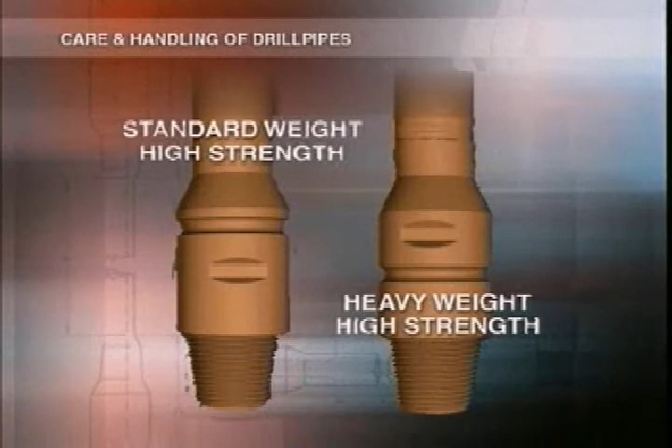In this section, we'll look at the descriptive markings that help to identify drill pipe. The first one is the high-strength identification groove. It's milled into the pin-end tool joint by the manufacturer. It tells you which pipe is high strength and which isn't.

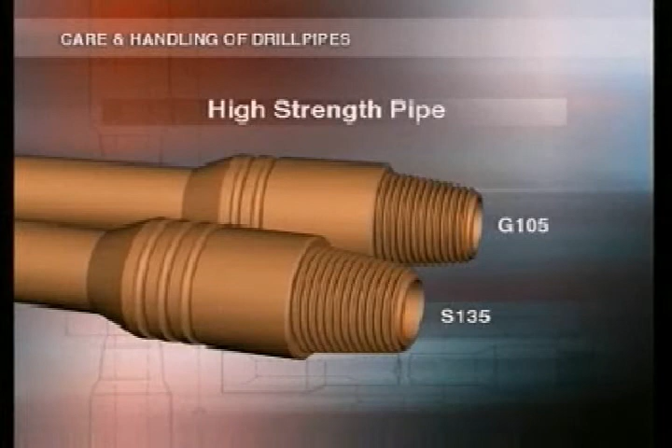For example, if it's in the center of the pin, that's standard weight high-strength pipe. If it's towards the taper of the tool joint, that's heavyweight high-strength drill pipe. Generally, most high-strength pipe is either G105 or S135, and standard grade is grade E.

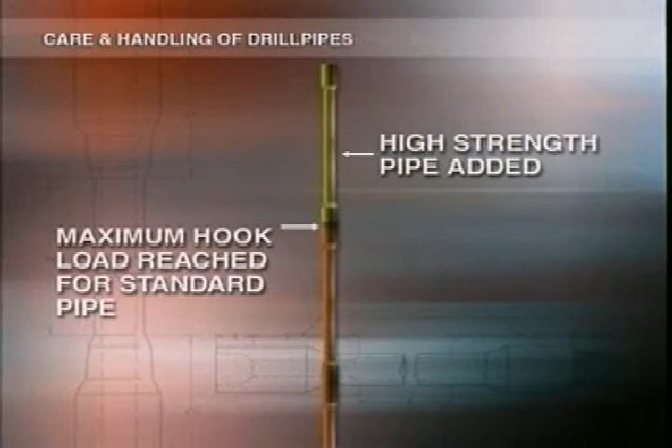When the maximum hook load weight has been reached for the standard pipe, high-strength pipe is added to the top of the string so that we can continue drilling. It's made of stronger and harder steel, so it can hold heavier weights. There is one major disadvantage, though. It's more brittle than the standard pipe.

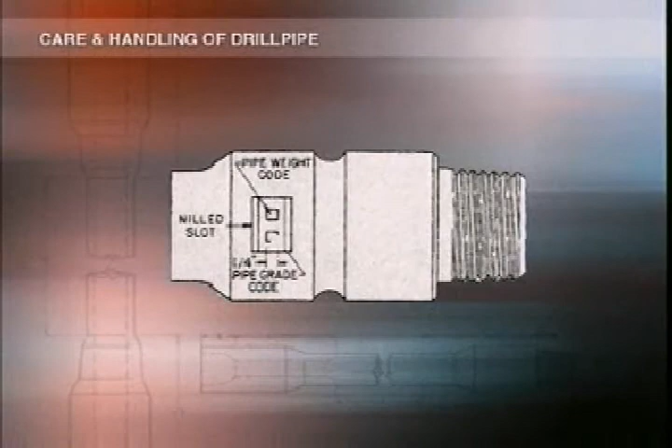Another mark in the pin is the identification milled slot. Inside it, you'll find the pipe weight code and the pipe grade code. Each joint bought by any one rig is sequentially numbered. The number may also be stamped on the tool joints by the rig personnel.

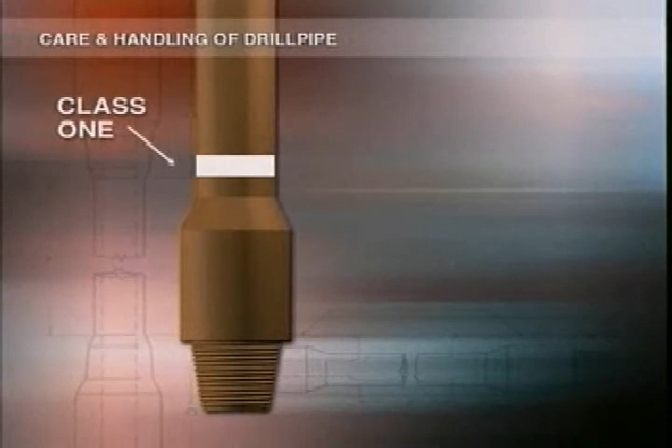We've already seen how bands of paint are used to identify particular conditions. Pipe bodies have their own set of markings. Get to know the system, because it'll help to avoid confusion when you start drilling with a string that's recently been inspected and graded. A single white band around the pipe body means it's new and has never been in the hole. That's Class 1.

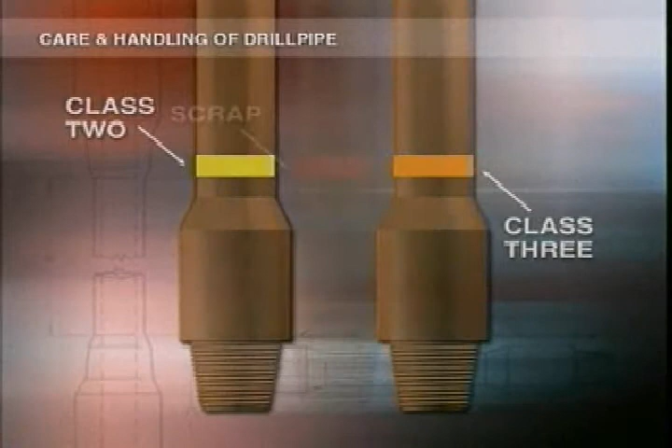Pipe that's been run at least once but is within specs is called Premium Class and has 2 white bands. A single band of yellow is Class 2, an orange band, Class 3. A red band means that serious damage has been found. This is scrap pipe and should never be run into the hole. The bands are all about 2 feet from the tool joint on the pin end.

Tool joints are classified using a similar system. New pipe doesn't have any paint on the tool joint. It'll only be marked on the pipe body, so a single white band on the tool joint doesn't mean it's a new one. The other markings are the same. 2 white bands for Premium,

1 yellow for Class 2, an orange for Class 3. A red band, which means either scrap or shop repairable. There can also be a green band to show that the pipe's field repairable.

You'll probably come across pipe with different classifications for each of the tool joints and the pipe itself. That means that one part has deteriorated faster than the other. The pipe classification reflects the maximum hook load it can support. The tool joint classification reflects its maximum torsional strength.

In this example, we're checking for maximum hook load. It's 5-inch, 19.50 pounds per foot, grade E drill pipe with 2 white bands on the pipe body, a yellow band on the pin, and 2 white bands on the box. So we look at the bands on the body, which tells us that it's Premium Class.

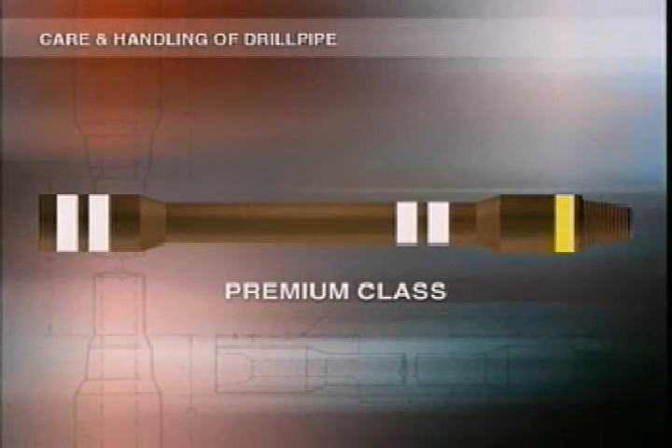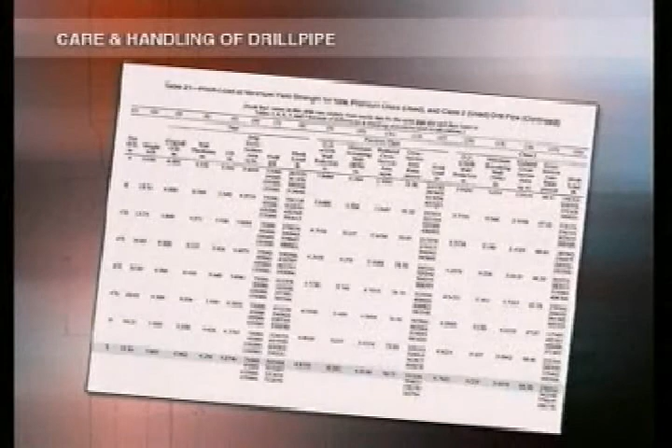We look up 5-inch 19.50 grade E drill pipe in Table 21 of the RP7G and find that Premium Class pipe has a maximum hook load of 311,535 pounds. Table 10 tells us that the significant factor in determining torsional strength is the OD of the box.

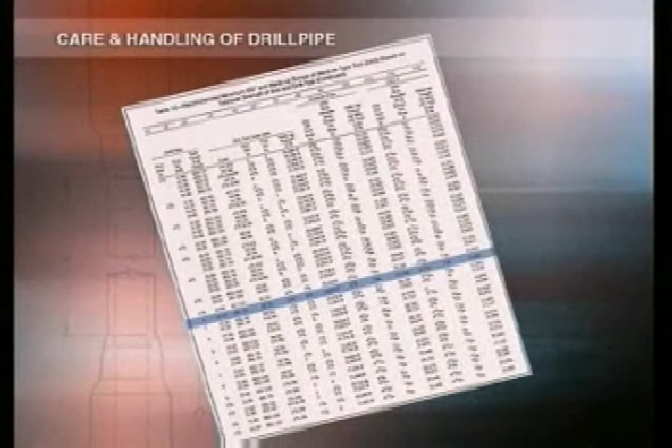Using the same tubular 5-inch 19.50 grade E, we see that the Premium Class box has a recommended make-up torque of 15,776 foot-pounds. For a Class 2 box with a thinner worn wall, it's 14,082 foot-pounds.

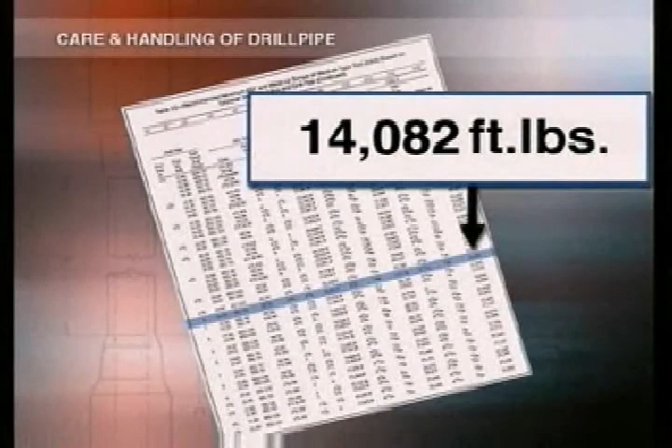After pipe's been run into the hole, the paint will wear off, so you can't rely on the coloured bands all the time. Because of this, the inspection company stamps information into the taper of the pin. Here we have the serial number of this joint, 128, the symbol of the inspection company, T, the classification of the pipe body, the dot, and the date it was graded, 96.

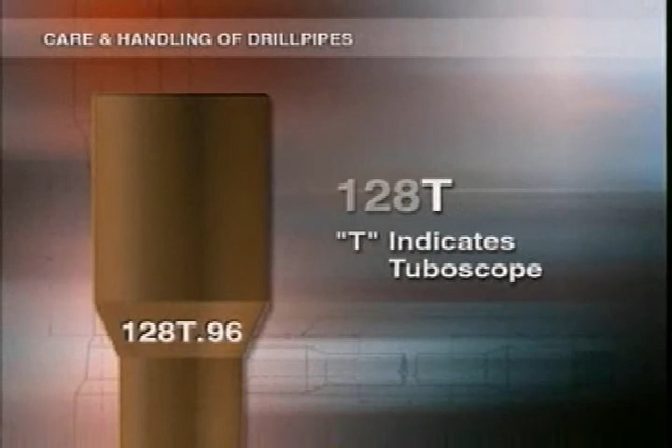If you want to, you can now get all the data on this joint by checking its inspection report. You're looking for a report made by Tuboscope, indicated by the T. The 9 stands for September, and for the year, you always refer back to the nearest one ending with the same digit. In this case, 1996.

If there's no dot, it means that the pipe hasn't been inspected since it was new. 1 dot means premium class, 2 dots are class 2, and 3 are class 3. There's also a benchmark. It's put in the thread area of the tool joints to give you an accurate way of working out how much shoulder has been and can be removed in refacing.

All manufacturers have their own symbols, but there'll be some sort of line or dot placed 1/8 of an inch from the shoulder when the pipe's new. On the pin, it's parallel to the shoulder with a circle or emblem of some sort just behind it. In the box, it's inside the counter bore.

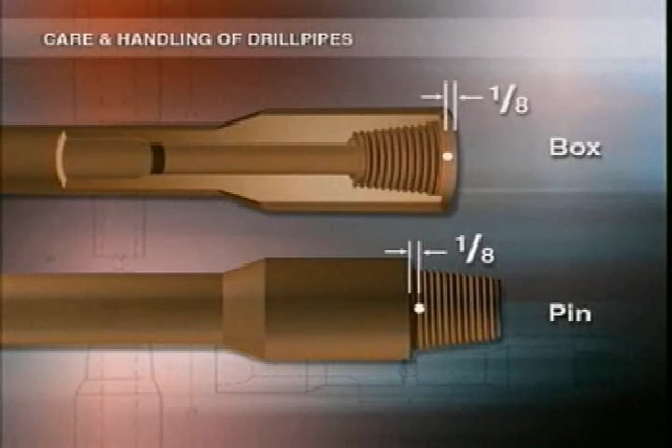Don't remove any more shoulder than necessary, and certainly never take from any single joint more than 1/32 of an inch at any one refacing, or more than 1/16 of an inch in total over the life of the connection. For example, on the pin end, the maximum distance from the benchmark to the shoulder shouldn't be more than 3/16 of an inch. If it is, you know that the shoulder's been refaced more than the total allowable 1/16 of an inch, so remove it from service for complete recutting.

On the box end, it's just the reverse. If the distance to the benchmark gets to be lower than 1/16 of an inch, too much shoulder has been removed. Those are the basic identification marks. Let's just summarize them. Use the API mill slot and groove method of drill string identification.

The markings at the base of the pin tell you the tool joint manufacturer, the month and year it was welded, the pipe manufacturer's symbol, and the grade of pipe. Pipe body classification is always marked near the pin. 1 white band for new pipe, 2 for premium class, a yellow band for class 2, an orange one for class 3, and a single red band to identify scrap pipe.

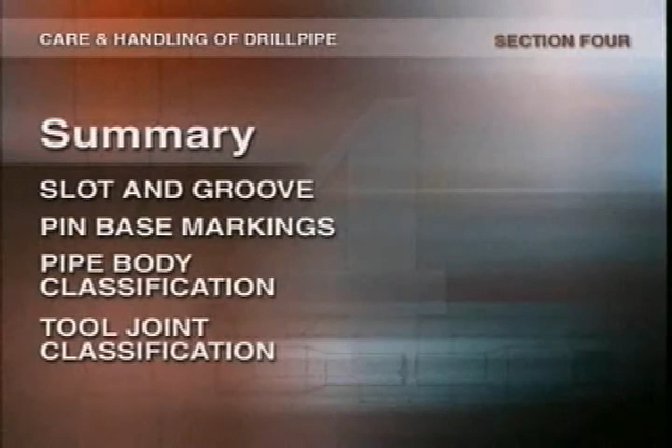For tool joint classification, if there's no paint band, it's new. 2 white bands on the individual tool joint mean it's premium class, 1 yellow means class 2, and 1 orange class 3. For tool joint condition, a green band means it's field repairable, and a red one means it's scrap or shop repairable. The classification depends on the degree of wear.

Information about the pipe is stamped into the pin by the inspection company. The benchmark is in the thread area of the tool joint to give you an accurate way of knowing how much shoulder has been and can be removed in refacing.